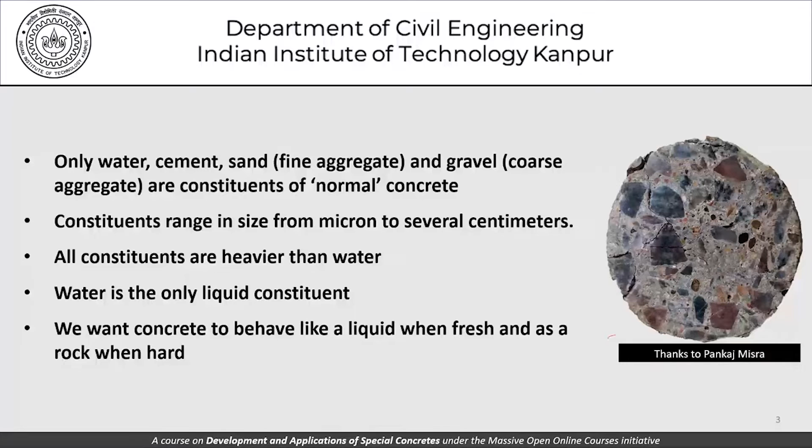Water is the only liquid constituent of concrete, and that's something which was borne in mind all the time. We want concrete to behave like a fluid when fresh and as a rock when it's hard, and that's important to keep in mind. Again, the suspension model: cement paste is a suspension of cement in water, mortar is a suspension of sand in paste, concrete is a suspension of coarse aggregate in mortar.

Concrete is a composite, and we've seen it as a three-phase composite in the previous discussion, and its properties are related to those of its constituents and their relative proportions. Cement and water are the only reactive components. The rest of it, fine and coarse aggregates, is basically filler material and is inert. It does not normally take part in the chemical reactions or the hardening process and so on.

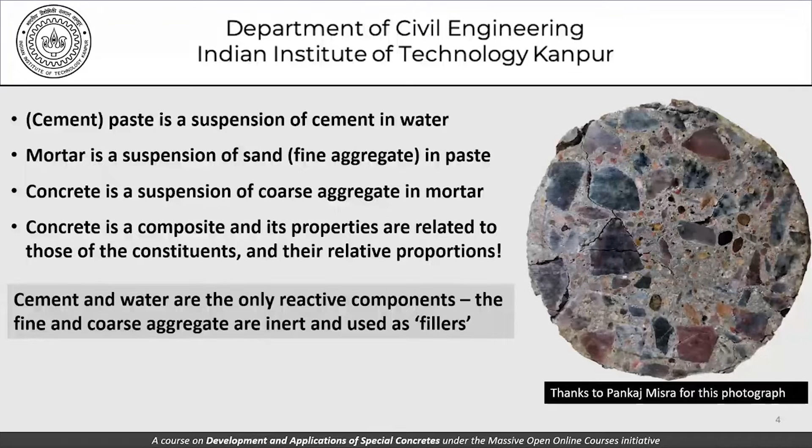Issues of constituents, proportioning properties, and method and environment of construction are intertwined. Having said all that, we should remember that this slice of concrete, which shows orientations or existence of coarse aggregates, fine aggregates, paste and so on in different places in the hardened state, must have had the same orientation, the same place for these materials even in the fresh state.

So that doesn't change. We did not plant aggregates there, so the aggregates remained where they are as the hydration process continued, and it became more and more difficult, impossible at the end of it, for the aggregates to settle down, which they would normally do, given that all of them are heavier than water.

I would leave it to you to work out the densities of paste, mortar, and concrete based on the specific gravities and the volumetric contributions of these constituent materials. Let's not do that. We of course know that the specific gravity of water is 1, and that's relative to which everything else is defined.

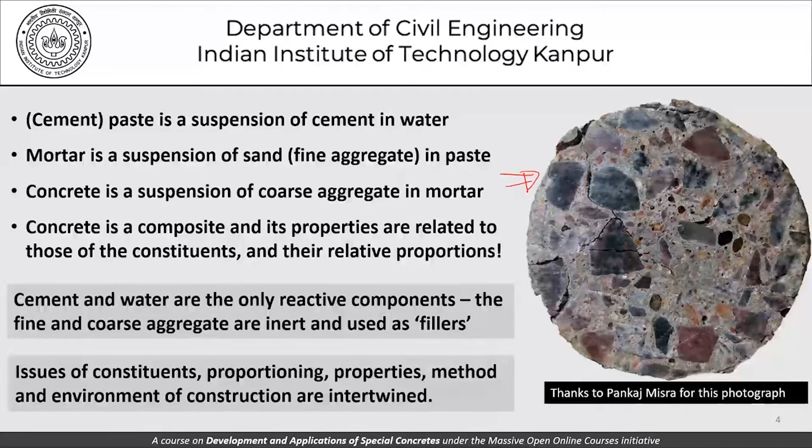This picture also I had shown you basically to tell you that this is the model for separated aggregates. Rest of it is mortar, and the aggregates are not in contact. That's something which we've seen in the three-phase model also.

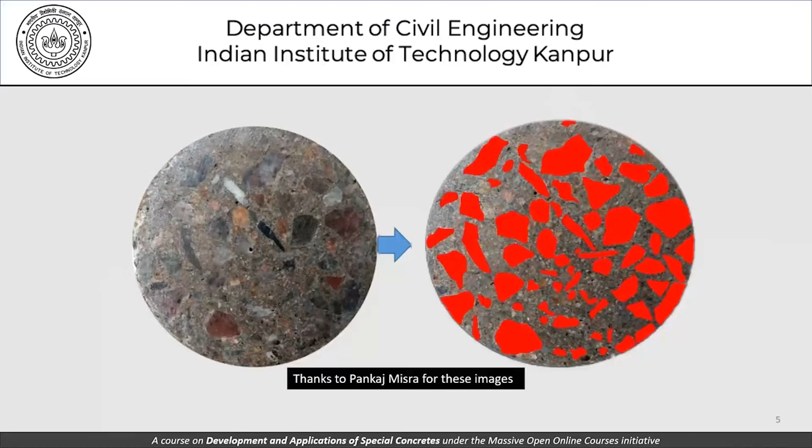Now let's try to get started with our discussion on properties in earnest. A review of that: functionally, the concrete should satisfy laid down criteria for the fresh state, that is, it should have adequate workability and other criteria that may be laid down. And in the hardened state, it should have adequate strength and any other criteria that is laid down.

Apart from that, those of you familiar with concrete design or technology will remember that it's not only fresh state and hardened state, but there are other conditions imposed when designing a concrete mix. For example, it could be durability, which means since this quantity is not very clearly understood or defined, sometimes codes place restrictions on parameters such as the water cement ratio and the cement content.

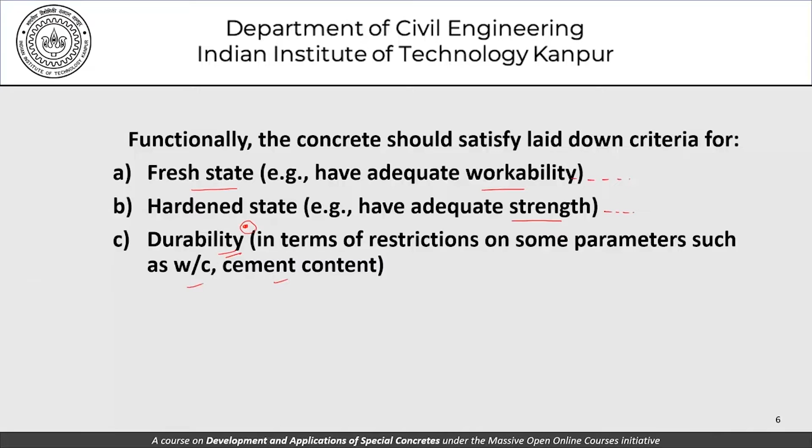For example, in India, we use IS 456 for the design of concrete structures, and that has a full table which classifies the environment and says that for different environments, what are the acceptable values for water cement ratio and cement content, regardless of other conditions which could be imposed in terms of slump or in terms of strength.

Then there are other conditions which could be imposed as far as concrete is concerned, that could be temperature rise during setting, it could be setting time. So these are the kind of set of parameters which define, in the larger sense, properties of concrete.

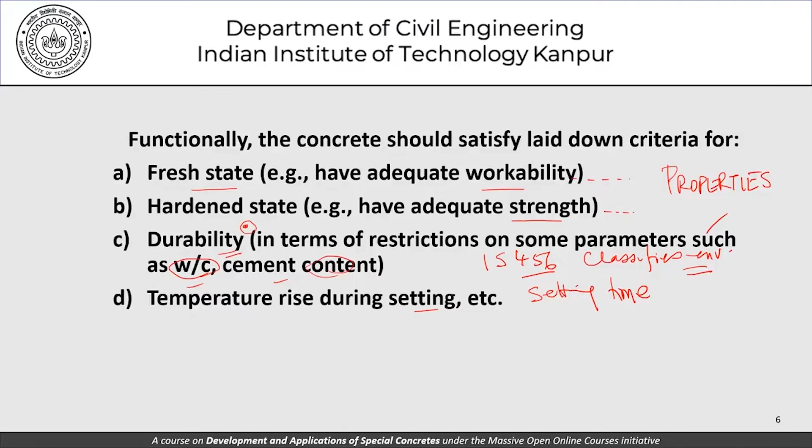Whether it is fresh concrete, hardened concrete, or any other kind of discussion that we have, it could be in terms of durability, it could be in terms of temperature rise, setting time, that is basically the time frame from fresh state transitioning towards the hardened state. Now, concrete should have these properties in the fresh and hardened state, and also meet durability and other requirements depending on the structure and the environment. So this is something which is laid down in the codes and specifications, which are kind of sacrosanct to us as engineers when we are working with concrete.

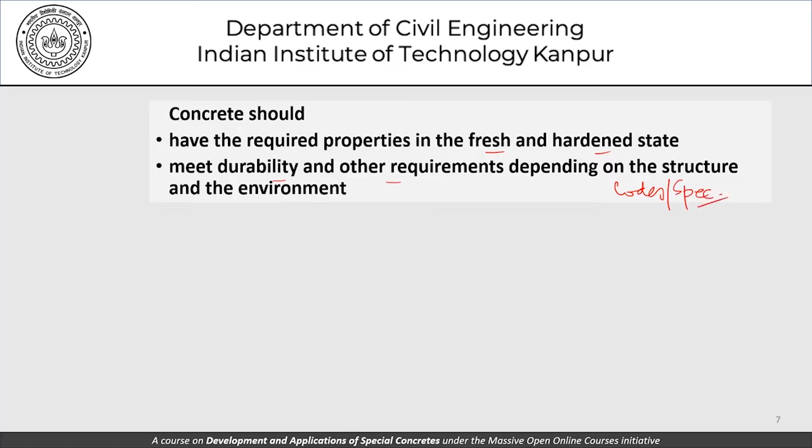In the fresh state, the properties could be workability, air content, the temperature of fresh concrete per se, and other properties could be the temperature rise, bleeding, setting time, and whatever else you may like to add.

There are different parameters which are representative of workability. For example, it could be in terms of slump, compaction factor, or any other test.

When it comes to hardened concrete, the most common parameter is compressive strength. Some codes prescribe the compressive strength in terms of the strength obtained using cylindrical specimens, and others in terms of cubes. In India, we use cubes of 15 centimeter by 15 centimeter. In certain countries, they use cylinders which are 10 into 20, that is 10 centimeter diameter, 20 centimeters height.

Now, I'm leaving it to you to think: what is sacrosanct about 15 by 15 or 10 by 20 as the size of these specimens? Why can't it be 10 by 10? Why can't this be 15 centimeters by 30 centimeters, or 5 centimeters by 10 centimeters? Why should this ratio be 2 and not any other? These are questions which should bother us when we are talking about an academic discussion.

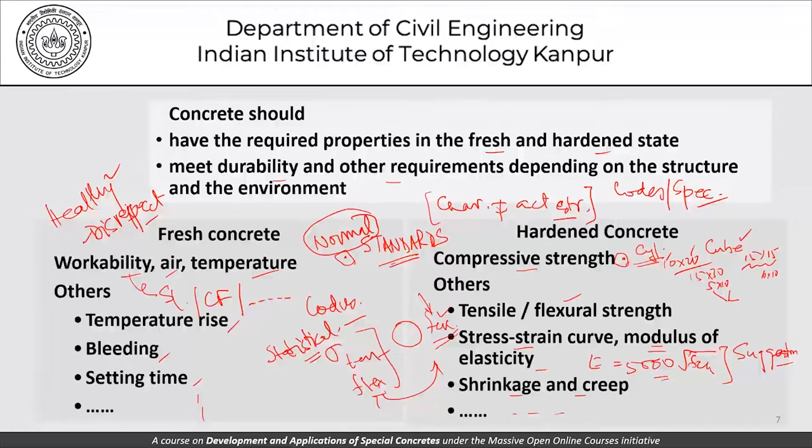Continuing further, let's try to understand the properties of fresh concrete slightly better: workability, air content, temperature rise, setting time, and bleeding. Let's study a little bit about these properties alone.

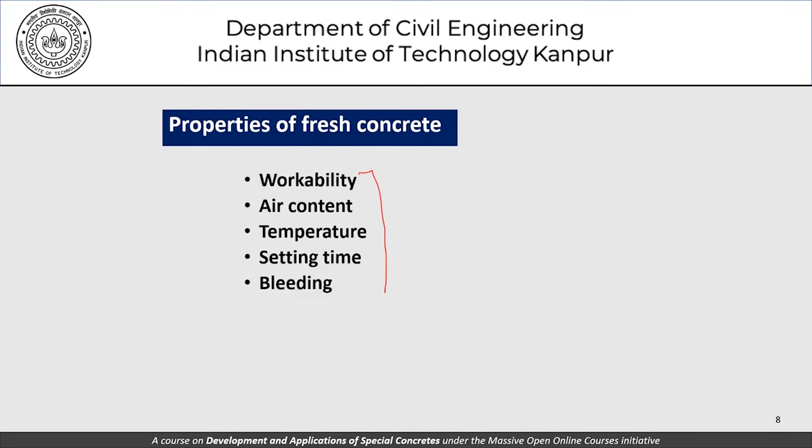As far as workability is concerned, there's another word often used along with it, and that's consistency. But for this course, we'll stick to our definition of workability, meaning concretes which are flowing are more workable. This workability ranges from very stiff concretes to flowing concretes, so there is a whole range here.

We have a few tests available to us: the Vebe time, the compaction factor, and the slump flow. They each have their own regions of workability where they are effective in discerning the workability of a concrete from another.

Slump, for example, does not have the discerning ability in this range here, because all concretes in this range of workability will give you zero slump. Similarly, all concretes in this range will give you a slump greater than, say, 18 centimeters or 180 mm, which to my mind does not make any sense as far as slump is concerned.

But in this range, we can use slump flow. In this range, we can use VB time. So that is the kind of discernment we need to use when talking about a method we want to adopt or adapt in our measurement of workability.

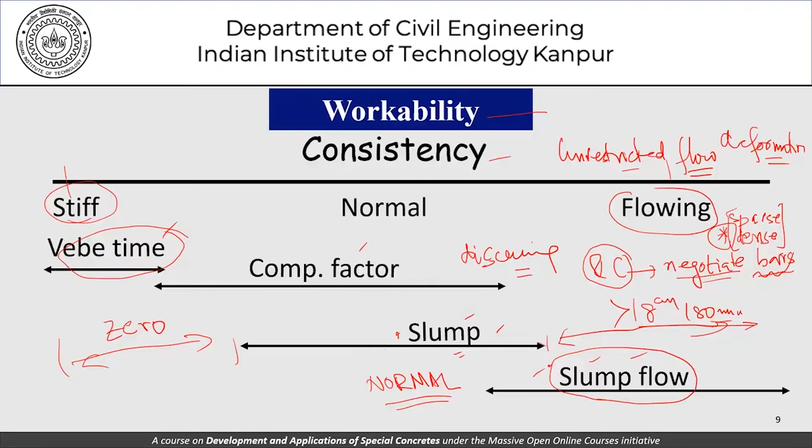So when it comes to development using special concretes, the onus is a lot more on the engineer to understand the issues involved and write the appropriate or the right kind of specifications, insisting on the right kind of test to be carried out. Now here is a comparative statement of concrete workability using slump.

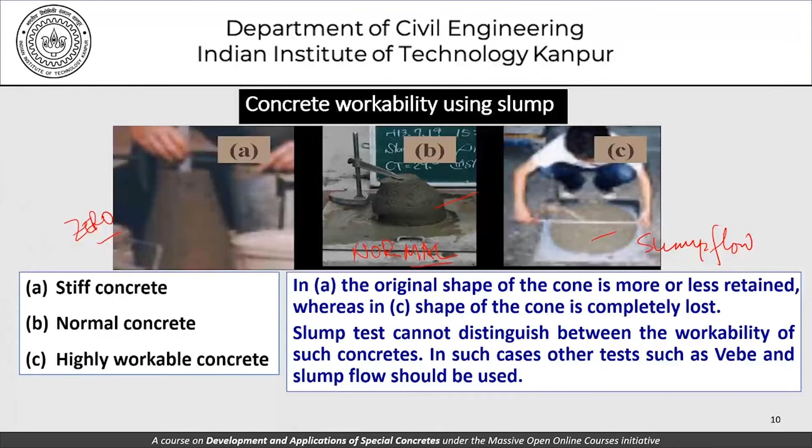Here we have something like zero slump concrete, which is very stiff. This I would call normal slump concrete, maybe about 8 centimeters, 10 centimeters, that kind of a number. And here we are talking of slump flow. Again, as I already mentioned, both this test as well as this test do not have any reinforcement or any barriers through which the concrete has to negotiate.

As far as air content is concerned, that's the second property we talked about. There are two types of air in concrete: entrained and entrapped. Entrained air, as the name suggests, is intentionally put in place and particles are very fine and uniformly distributed throughout the concrete. Entrapped air is unintentional and generally the particle size of air is much larger.

As far as non-air entrained concrete is concerned, the air content may be taken to be about 1 to 2% by volume, depending on the shape and size of aggregates. For air entrained concrete, which is a requirement for concrete exposed to cyclic freezing and thawing, it is supposed to be between 4 and 6%.

These kind of things are prescribed in certain codes. For example, in India, we'll have IS 456. In certain other countries, they'll have other codes, but these numbers are prescribed there.

Air in concrete increases the workability, may decrease the strength, and improves the resistance to cyclic freezing and thawing. How it does so is something you've already done in the previous course, and I'm leaving it to you to go back and brush it up a little bit, either through the lectures or through appropriate references.

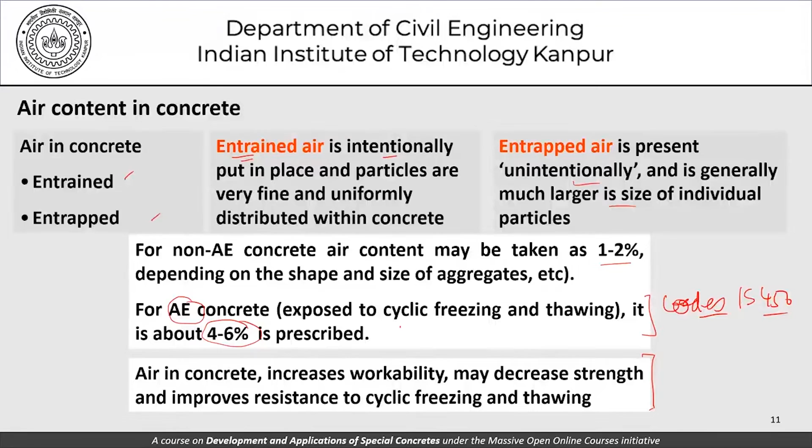Now, this is the way we test the effectiveness of air against freezing and thawing, through something called a durability factor. Now this durability factor, what it is, I'm leaving it out right now. It's beyond the discussion here.

So long as there is no air in the concrete, we are talking of 0 to say 2.5, 3% air. The durability factor is 0. That is, the concrete is not durable. It does not have the kind of resistance that is needed for cyclic freezing and thawing.

At around 4%, 4.5%, suddenly this is the range where air is extremely effective. Beyond this point, the air increases the durability factor to a very high number, maybe 85%, 90%, whatever it is. And beyond that, of course, the durability factor doesn't change.

And beyond this point, in fact, it starts falling again. So as far as engineering is concerned, the first step is to get hold of this data, to find out how much is the minimum air that I need to put in so that I will get a reasonable protection against cyclic freezing and thawing. Once we have that, we know how much of an air entraining admixture we need to put in to get to that air content. So this is how we really go about designing concrete for special purposes. This is just one example.

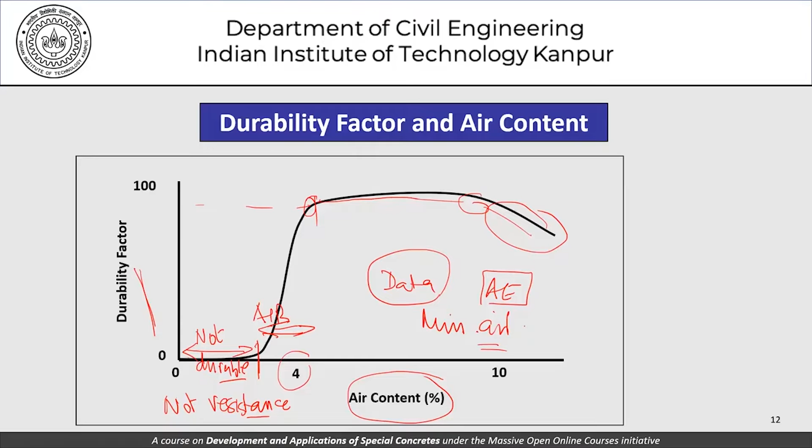How is air measured? The air in fresh concrete, how is it measured? In India, it's not very common to measure it, but it should be a part of the measurement of the fresh properties of concrete all the time. This is a view of an air meter which is used. Depending on the size of aggregates, the air content could be between 1 and 2% in all the concretes, and it could be 4 to 6% depending on how much of the air entraining admixture you put in.

This is becoming more and more important when we are using air entraining agents in concrete. There is something important because air entraining agents also will increase the workability. Air increases the workability of concrete also. The fresh concrete, because of these air particles which are spherical in nature, have this ball bearing kind of action which causes the coarse aggregate and fine aggregate to slide over each other more easily, leading to increased workability. Therefore, unless we measure the air content, we could almost be using an air entraining admixture as a plasticizer, and that's something which we don't want to do.

So here is an air meter which is used, and I would think that you guys should try to understand a little bit more about it, try to find out where you can buy it, try to see how you can use it in order to determine the air content of fresh concrete.

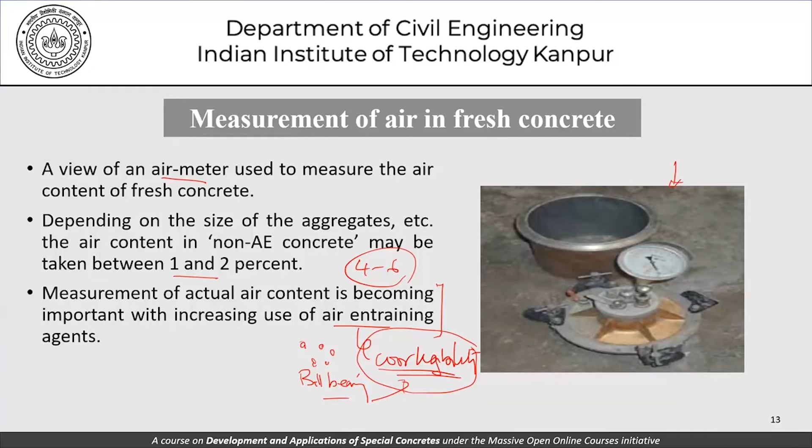Moving to the next property of fresh concrete that we need to talk about, that is temperature rise. Now, set up to record the increase in temperature in concrete on account of liberation of heat of hydration of cement. So cement hydration, being an exothermic process, leads to liberation of heat as the cement hydrates. Now this heat, unless it is allowed to escape or is taken away from the concrete, will cause the temperature to increase.

Because this is not a standard property of concrete. Why is it not a standard property of concrete? Because as far as cement is concerned, yes, one may say that under standard conditions we have cement particles, and these cement particles, when they hydrate in a certain manner with a certain water cement ratio and so on, they will give a certain amount of kilojoules per kilogram kind of heat. Now this is the property of cement.

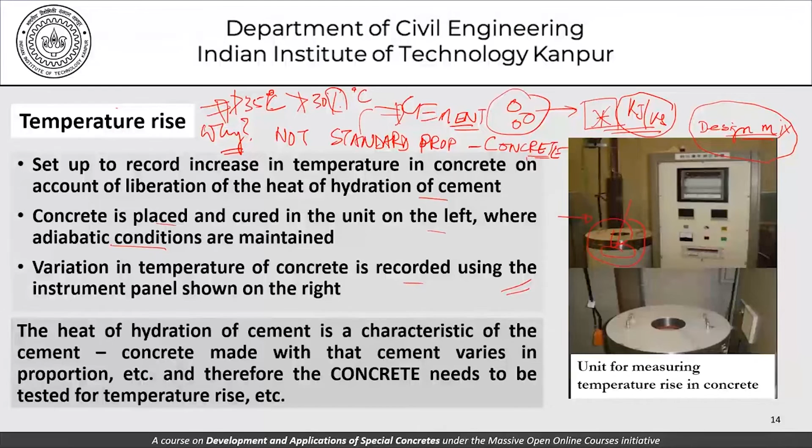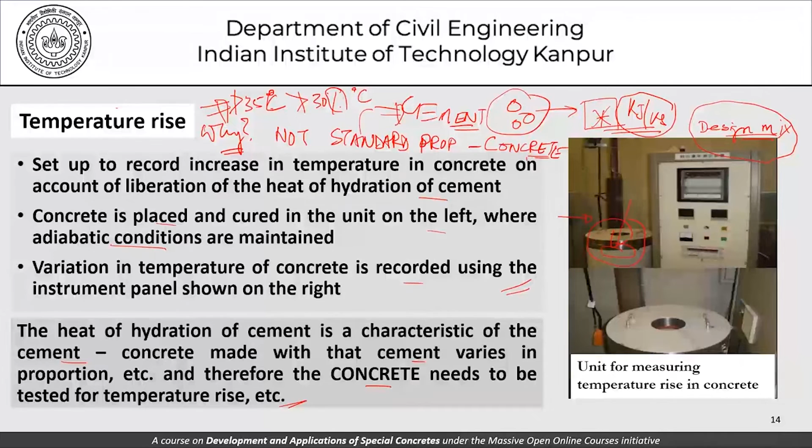The heat of hydration of cement is a characteristic of the cement. The concrete made with that cement varies in proportion, etc., and therefore the concrete needs to be tested for temperature rise in its own right. This is something we must keep in mind when dealing with cement and concrete: cement has certain properties, and concrete has related properties. These are governed to a large extent by the cement properties, but not necessarily the same. The initial temperature of placement is an important factor that determines the maximum temperature reached during hydration.

At times, efforts such as pre-cooling of constituent materials, use of chilled water, etc., are resorted to in order to keep the temperature of the fresh concrete in check. In fact, there may be specifications telling us that the temperature of fresh concrete when placed should not exceed 20 degrees centigrade or 18 degrees centigrade. Now, how you maintain this is by chilling the water first, then perhaps pre-cooling the constituent materials, and so on.

A simple thermometer is all that is needed to determine the temperature of fresh concrete. Of course, when it comes to temperature rise, a more elaborate setup is required if you want to do a study. But as far as just getting the data is concerned, all you need is some thermocouples buried in the concrete at appropriate places, and you will get those numbers.

My submission to those of you who have access to concrete sites is to actually determine this temperature rise in some concrete placements that you do. Try to do it with a normal slab. When I say normal, I mean the concrete slab should not have a thickness exceeding, let's say, 30 centimeters, 300mm or 400mm at most. The moment it starts exceeding 400mm or 450mm, things become different. So try to get the temperature rise in slab kind of concrete members, and compare that to larger concrete members, which could be large columns, maybe a meter in size, or bridge piers.

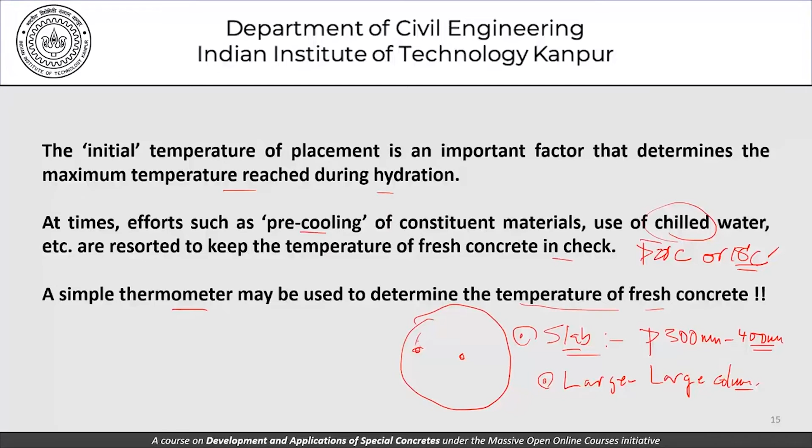Try to get the temperature variations not only at the surface but also in the core. Try to see how the temperature at location A and location B varies with time. Try to get this graph, temperature versus time, and see where you start, where you reach the peak, and come down. We'll discuss more of this when we talk about hot weather, cold weather concrete, and mass concrete, but this is just to start the discussion, getting the thought process going.

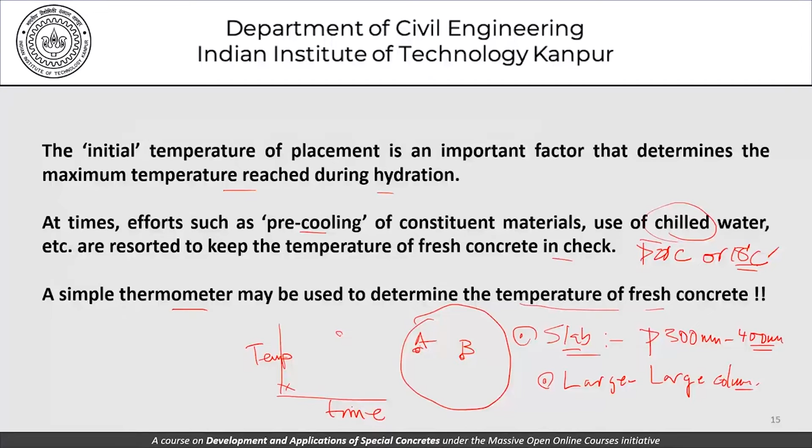Now, as far as recording the properties of fresh concrete is concerned, this shows an example of a record: the air meter with a certain reading shown here, the concrete temperature which is 29 degrees here, and the slump, which is 9 centimeters here. So these photographs, if kept along with the location where the concrete has been used, become some kind of record. All the time at sites, you need this kind of record so that it is archived—what was the temperature when we used the concrete in the construction of this column or that beam or wall, what was the date it was cast, what was the ambient temperature.

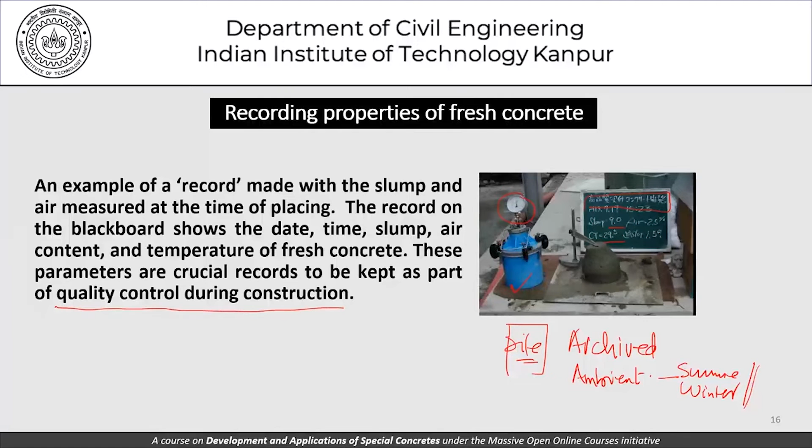The ambient temperature is also important—did we cast it in the summer, as far as India is concerned, or did we cast it in the winter, and so on. These are simple parameters that can be measured without too much effort, so we should try to do that. These are low-hanging fruits, and we should not try to cut corners on this when it comes to quality control. These are all related things. So as far as quality control during construction is concerned, this is perhaps the very first preliminary step.

Now we talk about setting time of concrete.

We are already familiar with the setting time of cement, based on the principle of penetration resistance. Go back and see how the Vicat tests are done, the Vicat needles and the Vicat apparatus, and try to understand that.

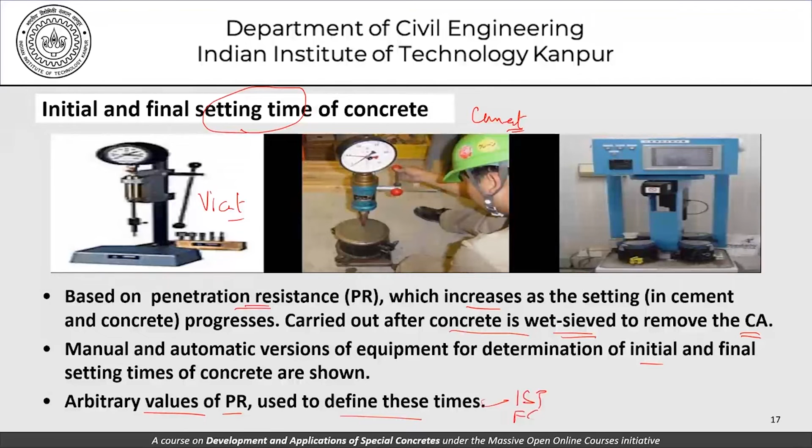As far as concrete is concerned, the test is the same. It is based on penetration resistance, which increases as the setting in cement and concrete progresses, and is carried out with the concrete wet sieved to remove the coarse aggregate. I'll tell you the reason why in a minute. Manual and automatic versions of the equipment are available, and we use initial and final setting times of concrete. Arbitrary values of penetration resistance are used to define these times - the initial setting time and the final setting time of concrete. This is what the principle is.

The setting of concrete is affected by the presence of chemical and mineral admixtures. The argument basically is that the penetration resistance increases with time on account of hydration. If we are somehow able to measure the penetration resistance and define this value and this value, we can say that once the penetration resistance is higher than this value, this time is what we will call the initial setting time, designated as T1. Similarly, for the final setting time, we have a higher penetration resistance value, and this is given the tag of final setting time of concrete.

Now when it comes to concrete, what is happening to concrete? How will it look like? It will have these kind of coarse aggregates here. What we are trying to do is put a needle to measure the penetration resistance. If this needle hits the coarse aggregate here, or misses it and maybe hits a smaller aggregate somewhere here, these readings will unnecessarily show much larger variations. The size of the needle matters, unless it is such that this effect of coarse aggregates can be taken care of. Now if we want to increase the size of the needle, what is the problem?

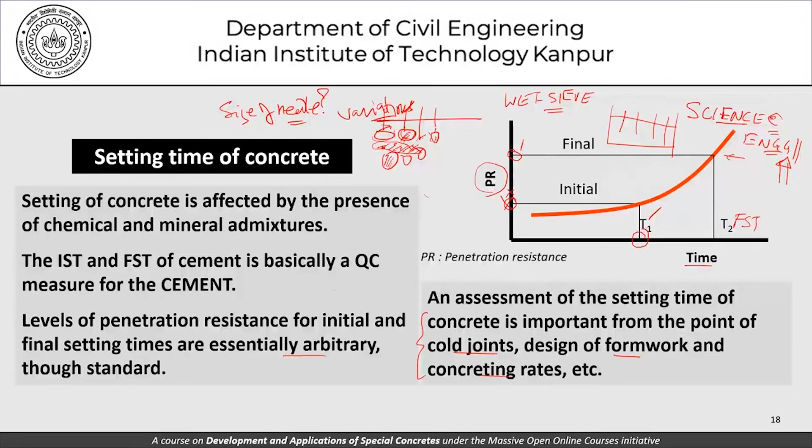Let's move forward to bleeding. Bleeding is a form of segregation, and is the movement of water present in concrete towards the top after placing. Some of it evaporates, some is absorbed back, resulting in a higher water cement ratio in the top layer. I'll show this diagrammatically in the next slide.

I'd encourage those of you with access to concrete to try this yourself. Even under non-standard conditions, put it in a bucket and see how much water accumulates as you keep removing it. You'll find how much water you can remove quantitatively, then try to relate that amount to the total water present in the concrete, which you can get from the mix proportions.

Suppose I use 180 kgs of water per cubic meter and take 20 liters of this concrete, so we know how much water we've used. If we're able to remove 50 or 60 cc, we know the percentage of water that has been removed as bleeding water.

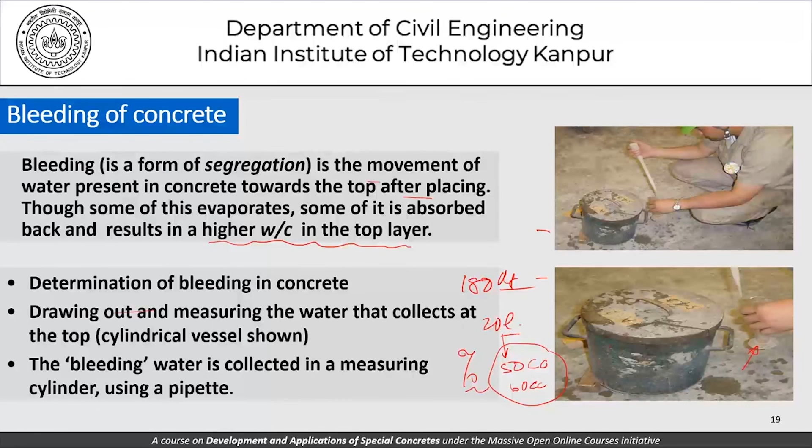This happens across cold joints, because at the end of it, this small layer of concrete has a higher water cement ratio. This means the mortar there has a higher water cement ratio, while the coarse aggregate is fine. So what we try to do is get rid of all this mortar and expose the coarse aggregates, so that when we cast new concrete above, these coarse aggregates become part of the new concrete.

This is what we had cast as the old concrete. So this is the kind of philosophy or thought process behind calling for removal of laitance, largely based on the principle that water accumulates at the top and needs to be removed. You cannot remove water directly, so you remove the mortar instead.